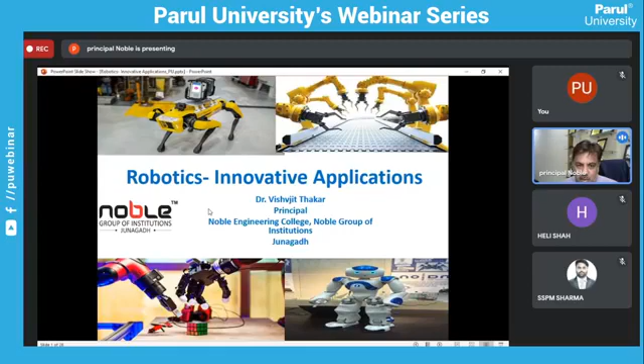As I have told you, it is an emerging branch with a large number of applications in different fields. Earlier, the robotic arm was popular and widely used in industries for pick and place applications. In fact, before robotics came, there were CNC machines. Computer numerically controlled machine tools were there, and then there was a robot along with them. Each one performed a different task.

A robot arm has to actually move in its workspace. It has to sense, it has to control, it has to take decisions, and it has to provide a safe environment. So in this particular seminar, we are going to talk about different robots and different applications, and you will find something new which you can try in your laboratory.

What we usually do is try to make fun robots. For example, there are Lego kits, and with Lego kits you can make different kinds of robots. Those are all fun robots, as we say. But actual industrial robots require huge power. The basic problem with small mobile robots is battery and power. You cannot connect a cable everywhere at every point of time, so you have to have a mobile battery which runs for a longer time.

As a part of that, energy harvesting in various networks and sensor networks is being used so that the battery can be charged and recharged. At some places, solar panels are mounted on robotic applications, where power comes from both solar and battery. So this is something new where everybody is running behind energy. A robot requires huge energy, and huge mechanisms are used in robots.

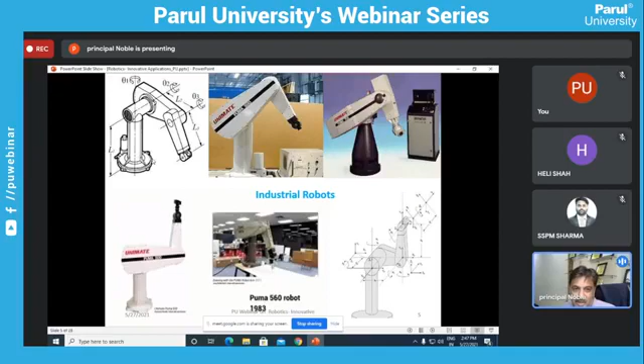When you see industrial robots, they are here and there in different applications. You can say it looks like a typical camel - this structure is camel-like if you look at it. A different type, but they are all heavy, with high-level DC servo motors, AC servo motors, stepper motors, BLDC motors. As advances in electrical machines go on, the joint motors keep changing. I've shown this picture just to give students an idea of what a robot looks like - these are graphical pictures and photographs of some industrial robots.

The history of robotics starts back in 1978 with the Programmable Universal Machine for Assembly by Unimation. This is typically the Puma robot, you can say assembly robots. When you have a large number of parts to be collected and put together in a day, you require a robot that works very fast. These are the older versions, 6 degree of freedom, with 3 degree of freedom at the end effector and 3 degree of freedom at the joints. You can see the different links here: link 0, link 1, link 2, link 3, link 4, link 5, and link 6.

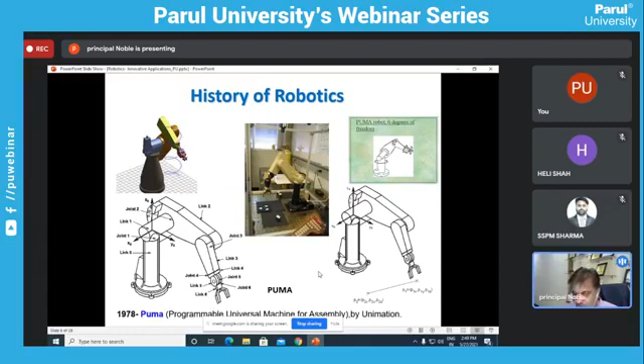To control each and every link, you need a controller. Every joint shown here is basically connected together, and these joints are called servo joints - they have a tacho generator and encoders mounted at the shaft which continuously give feedback to the controller. These are the base of the robot. This picture gives you an idea of how robots looked like, and still look like in some industries.

This is a SCARA robot, introduced in Japan and the US by Adept Technologies. You can see a different kind of structure, totally different from what you had seen previously. This is known as a hose pipe, through which various wires and connectivity go - maybe hydraulics, maybe pneumatic, maybe electrical. This gives you a much better idea about the different joints - joint 1, 2, and 3, and the end effector, joint 4. This is the base. So this rotates, this rotates, this rotates, and whenever it rotates around a particular space, it is known as the robotic workspace.

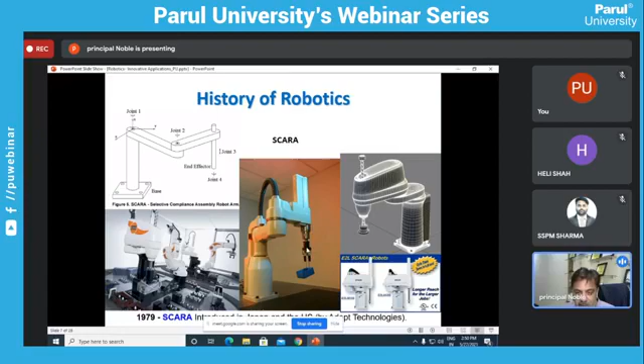So you can see different kinds of SCARA robots in this picture, which is picking up - you can see this is the end effector, and this is the cylinder. The end effector and cylinder, in which the tool is mounted - the tool is mounted in this particular cylinder. These pictures show you how robots would look like. People have an idea that it is exactly like a human, but it's not like that - it's basically a machine, a kind of machine. And this is typically the manipulator arm, we can say, in a particular case.

I will show you another video - we'll see a ball balancing robot. If it doesn't play, please let me know.

Gradually the sound will come.

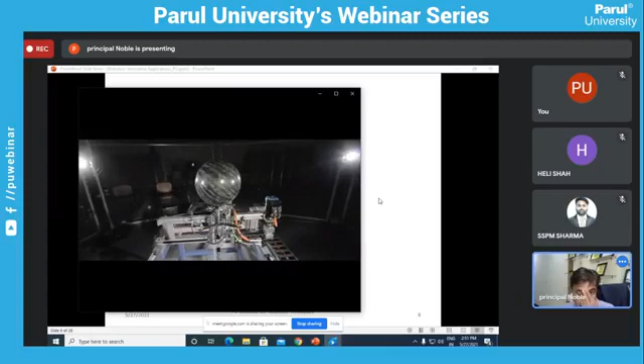Sir, the audio is not coming. Okay, because the audio is here on my PC, but that's fine - you can just see it, it's just a fun kind of music, nothing there. Nobody is speaking anything, this is just a visual.

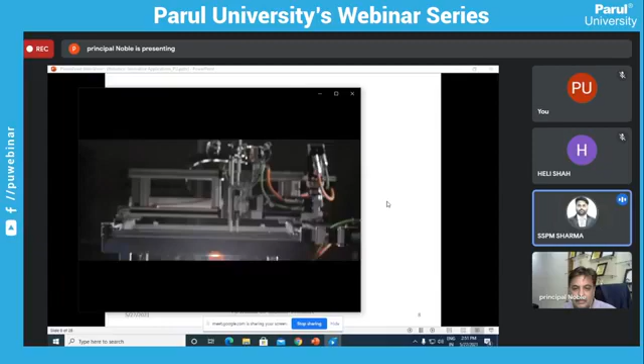Sure, sir, sure, thank you, sir. You just have to observe what is happening there.

Yeah, so that was a balancing robot. There was no actual voice in that. We have to observe the sensors, controllers, and how nicely it works.

Ball balancing is a typical problem used in control theory. The ball beam problem, where the beam tries to control the movement of the ball. Here the robotic arm is used, and you can see there is heavy mechanism, heavy friction involved.

As development is done, in different kinds of manufacturing systems this keeps on updating itself. Magnetic levitation systems can be much useful for balancing such a board. So there can be a project one can write, that magnetic levitation based ball balancing problem for a robot.

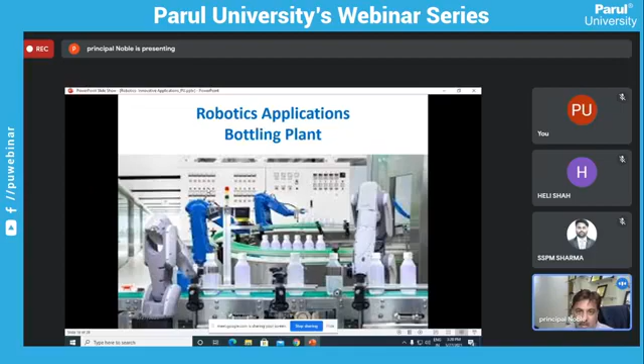First of all, you have to make a robot that makes the bottle itself from raw material. Number two, you need a robot which places the bottle at the appropriate place. Number three, you need a coordinated system which fills the material, the squash or juice, into the bottle.

Then lift the bottle, and then collect it. So there is scope for designing five coordinating robots for the food and beverage industry. This is a challenging problem.

If you approach a company, probably you'll get a project from an industry. Students in masters or BTech would have a chance to design a bottle-making robot, bottle-placing robot, feeding mechanism, lifting mechanism, and collecting mechanism. These are all well-known mechanisms for dairy industries, but for food and beverage there is still a lot of automation to come.

So a complete automated robotic bottling plant can be designed, and students have a huge opportunity to work on each topic I am mentioning. Each one has the potential of a BTech project, a master's project, or even research in a PhD project. There is a robotic experiment here that you will see, very interesting.

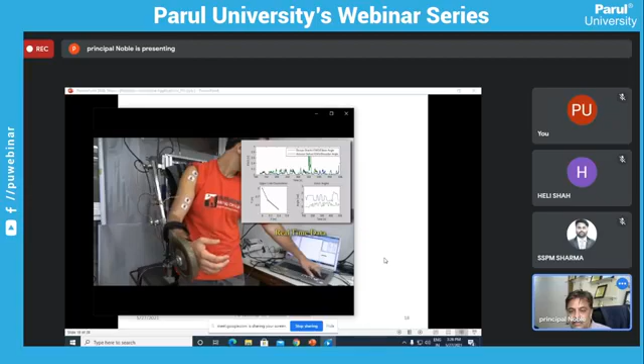Friends, you have seen how experimentation is conducted even in labs for robotics, with persons doing experiments on themselves to get the data and design their own system. This is the culture they have during postdoctoral and PhD studies in various universities abroad.

There is a spherical robot from IIT Madras. I will quickly go through this because we are running short of time. Quickly, let us see this video - we don't have much time, few videos left now.

This is from IIT Madras. It was also a video clip contest.

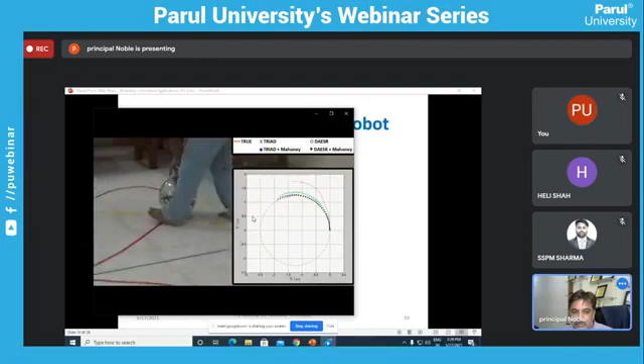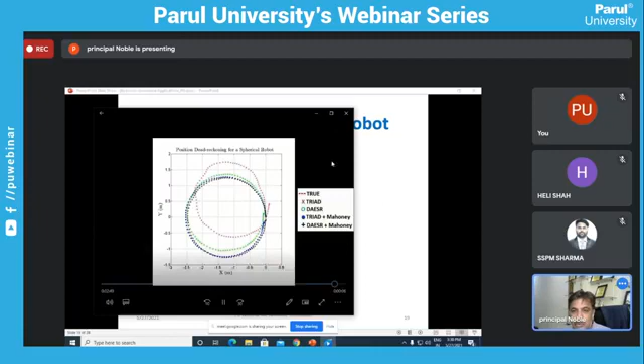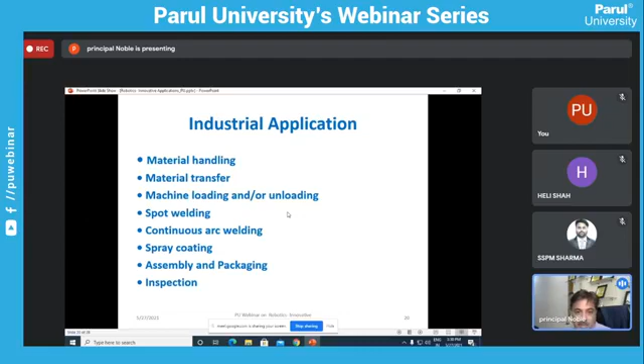So solar panel cleaning robots: sensing for dust, defining the boundary, vision-based guidance, control program, power driver and stepper motor. This is required for a solar panel cleaning robot. You can have a vision camera to map the boundary.

The newest application is the robotic digital postal ATM, which I actually proposed long back. If somebody can design it, it is a wonderful thing. Automatic identification of the address on the envelope needs to be done. Stamping needs to be done. Auto deduction of money needs to be done, and collection of envelopes. A robotic system works as a postal ATM and kiosk that may be placed at railway stations or bus stations. There are military, demining and surveillance applications, mining, excavation, exploration, transportation, healthcare, automobile, entertainment, utilities, warehouses,

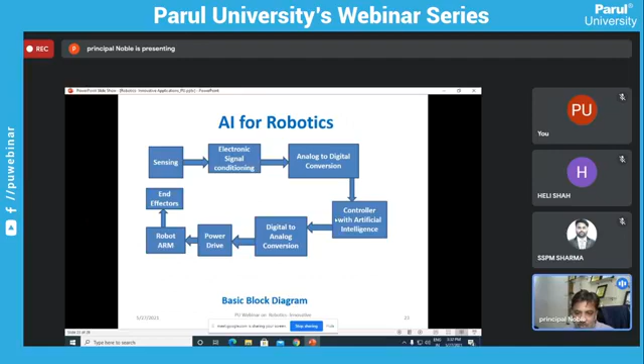Friends, innovative applications are an AI-based robot for fetching items from a superstore, an AI-based robot for fetching books from the library stack, an AI-based robotic arm for water leakage detection, monitoring, and control. These are innovative applications which one can easily make.

The recent trends: Internet of Robots, unit web design, IoT protocols, physical and electronic interface, sensors, cloud, and ROS. Those who want to do a research project, BTech project or master's project should focus on Internet of Robots and try to study Robot Operating System. A lot of people are now working on ROS for Internet of Robots, or Internet of Robotic Things. So this is the ultimate application, Internet of Robots. There is a robot which can run, but we are running short of time.